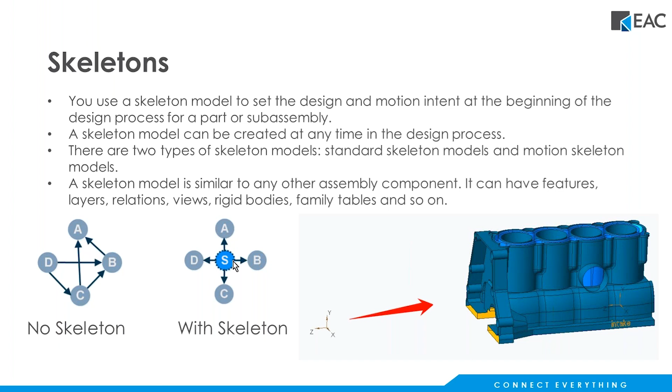So some important considerations to think about. First of all, you can only have one motion skeleton in an assembly, but you can have multiple standard skeletons in an assembly. There's a config option. By default, it's set to no, but if

you set multiple skeletons allowed, yes, you can have

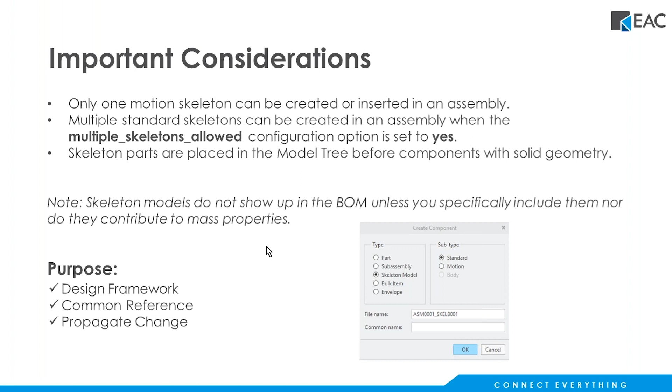Maybe another way of working with this is to put the skeleton at the top and have the subassemblies reference that skeleton, and then all the parts reference the skeleton assembled into those subassemblies. Again, all these skeletons are identical, so they do have or can have more information in them than what subassembly 2 needs, because it has information in there that 1 has.

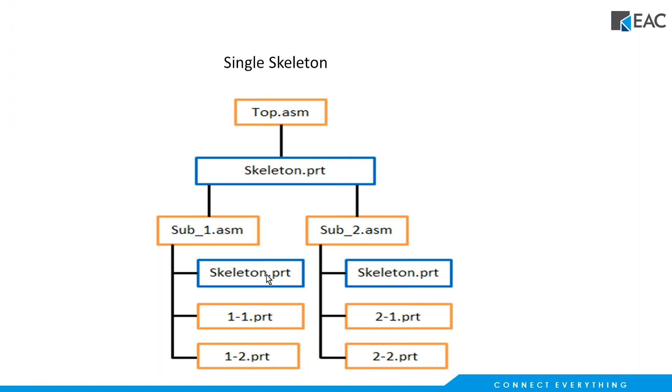But again, it's a real simple technique to use to kind of control the referencing of parts. Then we have multiple skeletons. So in that particular case, you have a unique skeleton for each subassembly. When we put in multiple skeletons that are all unique, we put one under each subassembly. And then that has the unique characteristics that only that particular subassembly would need.

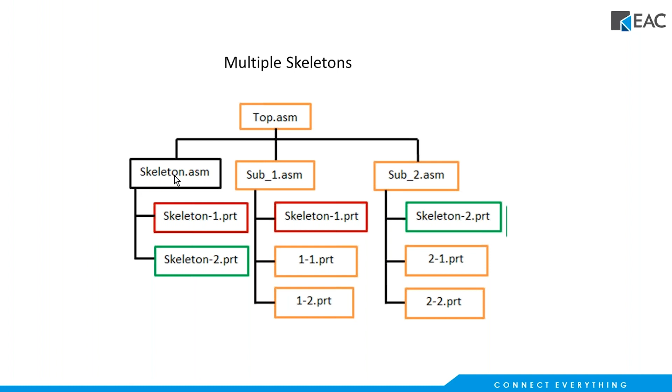Maybe another way of looking at this would be, I'm going to create a skeleton assembly. Now, there isn't really a model type or file type called skeleton assembly, but what you do is you just create an empty assembly, and then you put the skeleton parts in it. So in this particular example, this skeleton assembly, or basically it's just a regular assembly, it's just a holder. It's like a bucket holding various skeleton parts that I'm going to use in my top level assembly.

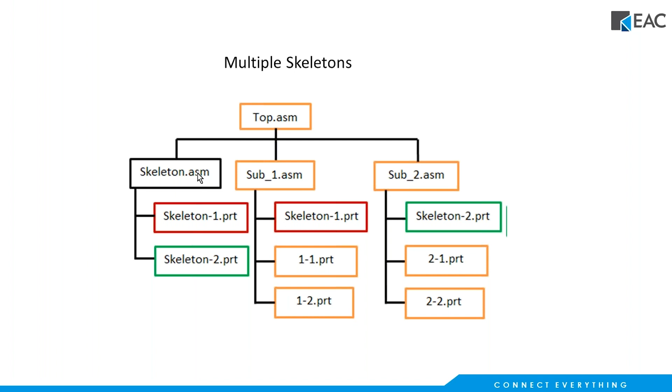And then those individual skeletons are then assembled into each individual subassembly. So just kind of a different way of organizing things. A little bit more elegant, maybe, doing it this way by placing them all under an assembly there, so we can have kind of one-stop shopping where we know to look for all the skeletons that we may need.

The next one, as you know, is hauntingly similar to what we just saw. It's called a skeleton assembly. It's the same approach where each subassembly gets unique skeletons for it, but it extends that multiple skeleton approach by, in this case, these unique skeletons are in a

skeleton assembly, but their locations and their orientations are important, right? So we're basically making an assembly of skeletons, and they're all assembled in the correct location and orientations that they would need to be in the assembly if they had parts in them. And then again, we just assemble each one of those skeletons into the individual subassemblies.

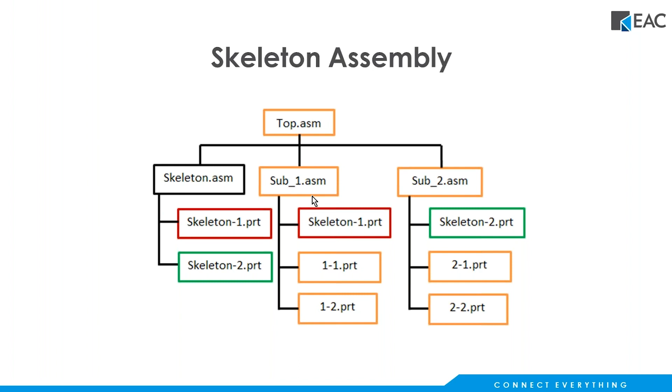The final technique is called the Hanger Map Method. And this is kind of the old school way, right? And even some of the NX guys still work like this, where in this case, we might have a series of coordinate systems. Here I have a skeleton with coordinate systems on it. But then what we do is when we assemble our parts is we just say, I want the part coordinate system to align with the skeleton coordinate location.

And we're just basically hanging the parts on these coordinate systems. You don't have to use coordinate systems. You could use datum planes and things like that. But to keep it simple, if you use coordinate systems, that's probably its biggest advantage, is that it's simplistic.

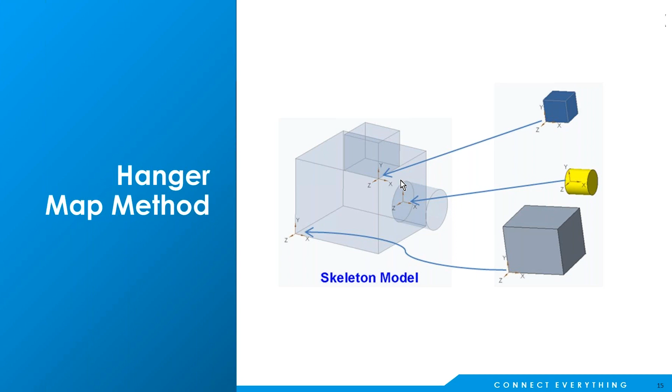So now that we've talked about these 4 different techniques, you want to start to think about really what do you want to accomplish with your skeletons? Which one of these techniques do I use? What are the objectives of my particular assembly or product that I'm working with? So there's a couple things that we want to look at.

First of all, we want to look at reducing complexity. And that just means that we want to minimize component interfaces to the top assembly, right? So we want to kind of shield those components from the top assembly using the skeleton as an insulator. Second, we want to simplify the modeling effort. So again, we want to reduce external references, not only between components, but also to the assembly itself.

We also want to increase design flexibility. Does it support changes to the interfaces of those subassemblies, or can we easily change those? And can we easily change maybe space claims for those subassemblies? And then we also want to think about large assembly management, right? So does it allow for modularization of the top level assembly? Can you break down the top level assembly into various components?

And then does this particular approach allow for the control and sharing of common information? So even though we might have different skeletons, we might want to pass information between them. It could be parameter information, it could be relations, things like that. So we still can pass things between skeletons. Does this approach that we're going to use allow for that type of passing of information inter-skeleton, if you will?

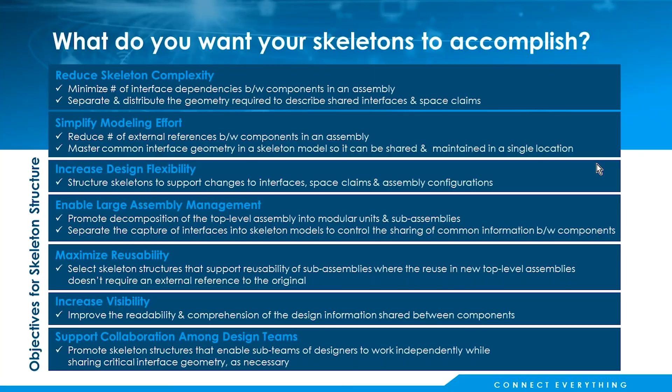The next thing we'll talk about is multiple skeletons. Well, let's take a look at a single example of a single skeleton first. So I have Creo up, and here's an assembly. This is an old Creo assembly from the old days, but what we have here is I've taken the motor, the block of the motor, and that's really the skeleton. So here's my skeleton. What I've done is I basically used the old master model technique.

What I did is I created a skeleton, and then I said merge in the motor block. And when it brings it in, it doesn't bring it in as a solid, but it brings it in as a quilt. And when we talk about skeletons, I kind of look at them from the standpoint of they do one of 2 things usually. They provide locations where things should be mounted, and it also can provide an envelope on where things should fit inside or fit outside of.

In this particular example, the reason I used it as a skeleton is because it has both. So I could have easily made this skeleton with a couple of axes here where the mounting hardware would be, and a couple more down here, maybe a cylinder to represent where the sleeve would be for the piston, and then maybe some internal surfaces for where the crank needs to go and an axis down the middle and things like that. And that would be a pretty simple skeleton.

In this particular case, though, the skeleton not only has all the locations of where I should mount things, but it's also being used as an envelope for all the internals of this. So now the piston knows where it should fit and how it should fit in this particular motor block. The same with the piston rod and the crank and things like that. So this particular skeleton is being used both as an envelope part and as a reference for mounting.

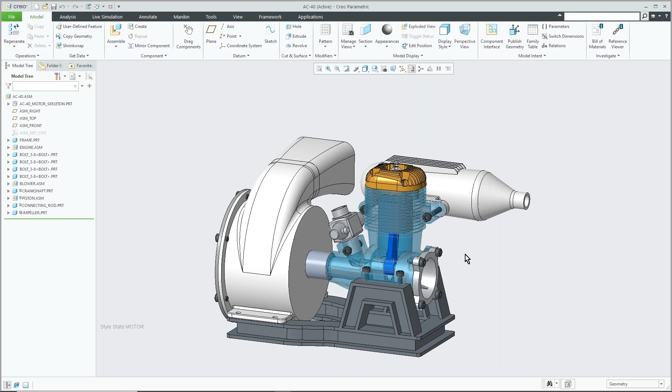As you can see, it can be pretty complex, right, compared to a couple of coordinate systems and some axes and planes and surfaces that I could have used. But again, this is actually a really good technique for something like this, where with this particular skeleton, I'm mounting everything to it. They all kind of use the same skeleton information. Every one of these assemblies uses this skeleton.

So let's go back and let's talk about multiple skeletons. So that's really where we have a unique skeleton in each subassembly. The design information of the entire product is split up, right, between the subassemblies. Skeletons can be referenced across a wide range of subassemblies.

So we can break the information up into a variety of different subassemblies, and then if we have a larger company, we can part out those skeleton subassemblies to the other groups that would be designing this. So it's a really good technique for breaking down the information into unique packets and then distributing that to the different design groups that are there.

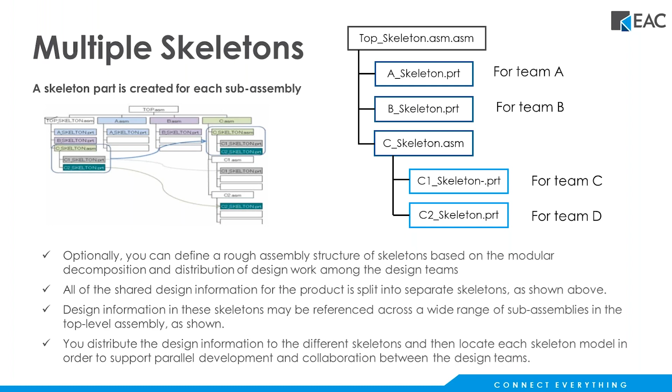So let's look at an example of this. So here's an example of multiple skeletons. Here I have a framework, and I have 3 cabinets that this framework supports. Each cabinet is totally unique. It doesn't interface with the other cabinet, other than the fact that it might be next to it. But all the components that go in it, these are space claims that I'm using these skeletons as.

But each subassembly or cabinet in this case is unique. So the components that go in it are unique. Its function is unique. So it's a really good reason to use multiple skeletons. So here I have just 3 skeletons out here in our tree sitting at the top. Whenever you create a skeleton, first of all, in an assembly, it automatically moves it to the top. You can create it whenever you want, but it will always move it to the top.

If you assemble a skeleton into an assembly that doesn't have a skeleton, it automatically assembles it at the top at 0, 0. Any skeleton after that, you can assemble like any other skeleton or any other part with mates and aligns and offsets and things like that. But here I have those 3 unique cabinets, right? The left cabinet, the middle cabinet, and the right cabinet.

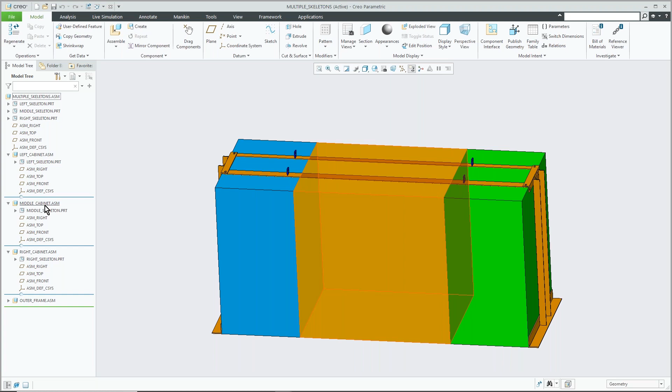And I've taken those skeletons and I've assembled them into each subassembly. So here's the subassembly for the cabinet, which has the left cabinet space claim for the left cabinet skeleton. And then here we have one for the middle, and then also one for the right. So all I'm doing is just taking these skeletons and assembling them into the subassembly, and then I can part out those subassemblies to various groups, and they can start to design, in this case, within the bounds of the envelope parts that I've created here as skeletons.

Let's take a look at the next one, the skeleton assembly. This is real similar to what we saw here, but it's a little bit different. I'm going to go through this one a little bit more in depth because there's a little bit more to it. But a skeleton assembly actually extends the multiple skeleton approach by adding the skeleton organization in terms of an assembly, and those individual skeletons are assembled in orientations and locations that the actual subassemblies would be in. So this is really useful for large assemblies with many unique components developed by multiple teams.

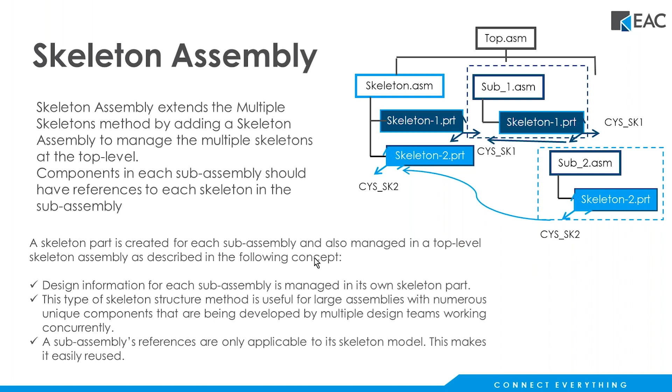Subassembly references are only applicable to the skeleton that is in that subassembly, which makes it very easy to reuse those subassemblies and those parts that reference those. Because they're only referencing skeletons, it's easy to pull them out and use them elsewhere. So let's look at an example of this. So in this particular example, this is a computer. And what I'm looking at here is the top level skeleton assembly. So what I did is I just created an assembly, and then I started assembling skeleton parts into it.

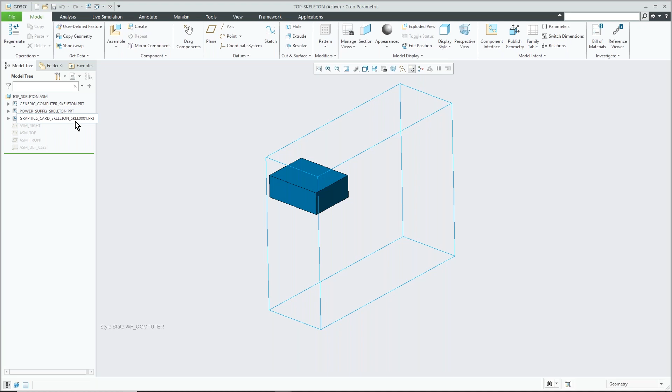So the main skeleton portion is really the outer box of this desktop computer. The next assembly that I assembled in is right here. This is the power supply. So the power supply just has space claim in it, right? So anything I create for the power supply goes inside of that volume. And then finally, I created something for the graphics card. And basically, this is a simple subassembly that has a coordinate system where the graphics card is.

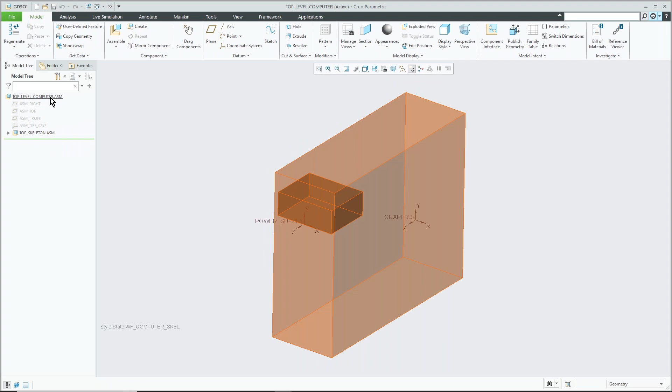Right? So you notice that these skeletons are located in the main skeleton in their actual positions. And this is going to become important in a second here. So I'm going to close out this skeleton assembly, and we're going to look at the top level computer assembly with the skeleton assembly assembled in it, right? So here's the top level computer assembly with our skeleton assemblies right here assembled in that we saw before. So now I can start to add and actually kind of part out these things.

So the first thing that I would do, I'm going to open up, let's say for the power supply, that subassembly. So I can copy this power supply into, create a subassembly for the power supply, put the skeleton part in it, and give it to the power supply guys to develop that.

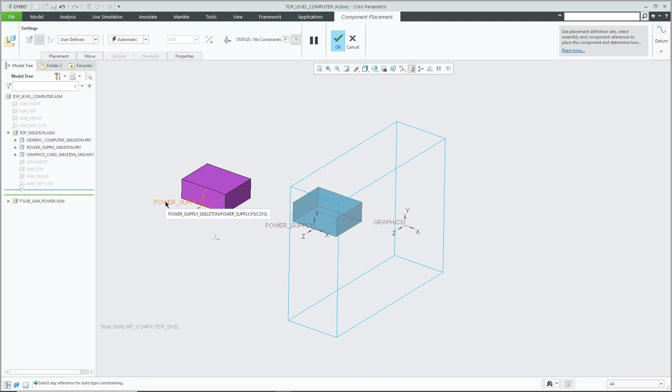So when they do that, I'm going to go over here and say, let's get the power supply assembly. Let's open that up. So here it is. Here's that skeleton. And what I'm going to do, so this is what's different about this, is I'm going to now assemble this. I'm using the skeleton in the subassembly and assembling it to the skeleton in the top level assembly. So I'm actually kind of assembling the skeleton to itself. So I'm going to say take this coordinate system and align it with this one.

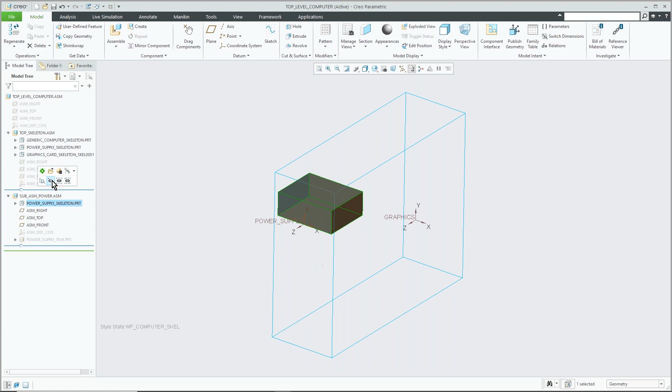So now in this particular example, when I added this subassembly in here for our part, I'm going to say let's hide our skeleton here and let's turn on the part that we have for that. So here's the part. It sits inside that skeleton. Because the part fit inside the volume and was correctly assembled into the top level assembly, everything works out good.

Same thing with the graphics card. So in this case, I'm going to say, let's take the subassembly for the graphics card. Whoop, not this guy, we got to cancel this. Let's go in and assemble in the graphics card. So here's the graphics card. And again, I'm going to use that coordinate system. So I could come over here and say, let's take this graphics coordinate system here and assemble it to this one.

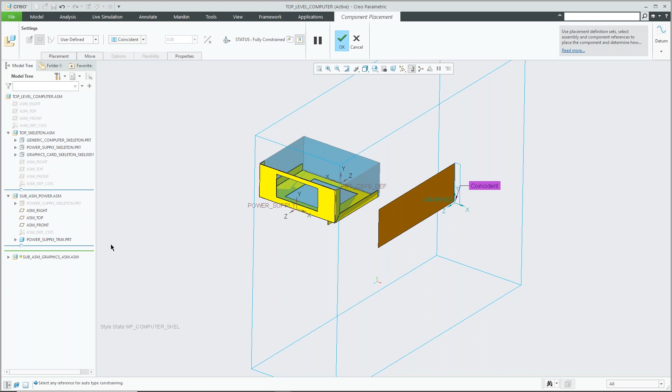In this particular case, what I did for a little subskeleton in here is I just put a plane in here. And this represents the board itself, the size of the board and the location of the board. But now I can start assembling the real geometry onto that. And so if I go in and turn on the components once they have been created, let's turn this guy on. We can see that we now have the graphics card assembled in the correct location. And with these reference skeletons, it's very easy for me to pull this graphics card out with its skeleton and assemble it somewhere else.

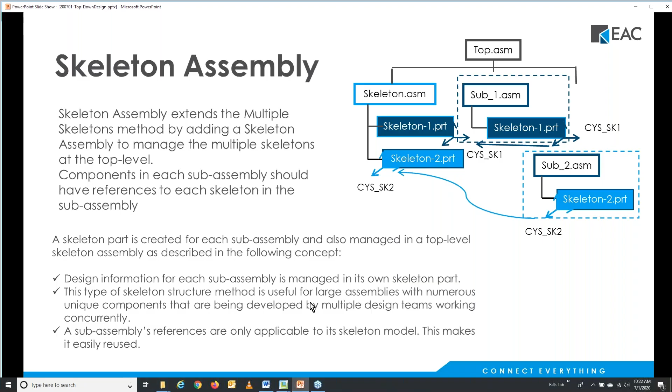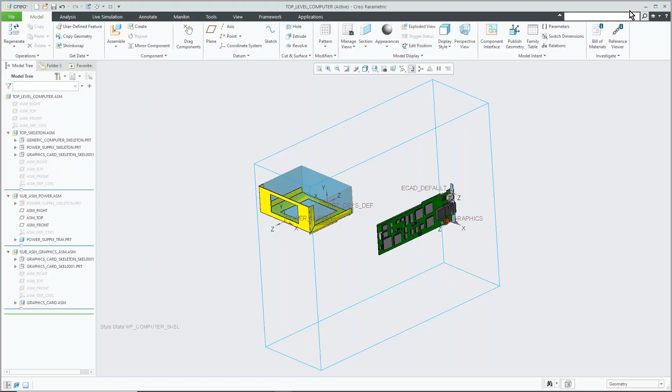In this particular example I'm using a coordinate system, and technically that's usually what people think of when they're talking about the Hanger Map Method. I'm going to place a subassembly in, but I'm just going to place it using a coordinate system. Real simple. But you could use datum planes in your skeleton and assemble it that way, should you choose to do that. So let's take a look at working with that.

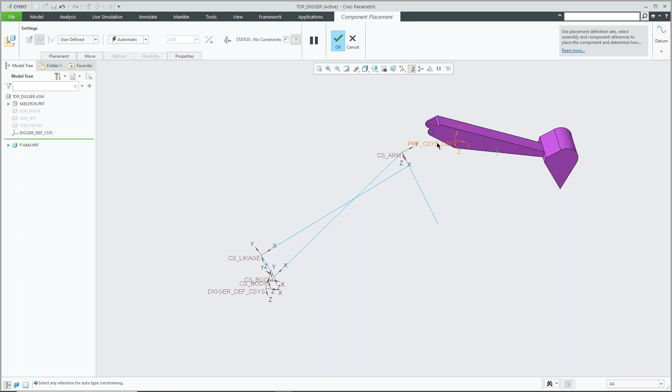Here I have a top-level assembly. I put a skeleton in there. The skeleton just has a couple of curves and then some coordinate systems for placing parts. So if I want to assemble my parts in here, I'll say, let's grab maybe the arm part. I can place that over here. Let's take this coordinate system and assemble it to the arm coordinate system. So first part's in.

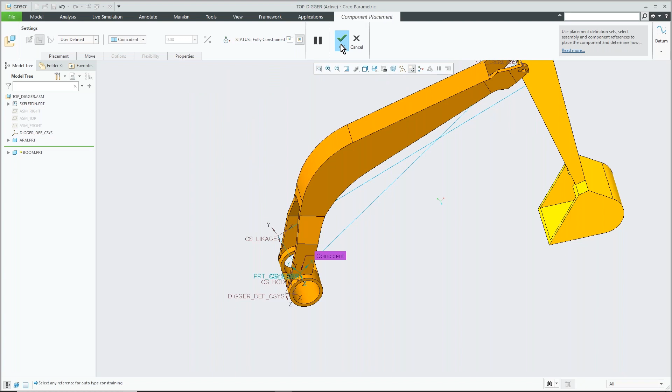Let's assemble in, let's say, the boom. So here's the boom. Let's take his coordinate system and assemble it to the coordinate system for the boom. And we notice that it's all oriented correctly, so things line up. And then finally, let's assemble in, I don't know, like the main body of this guy.

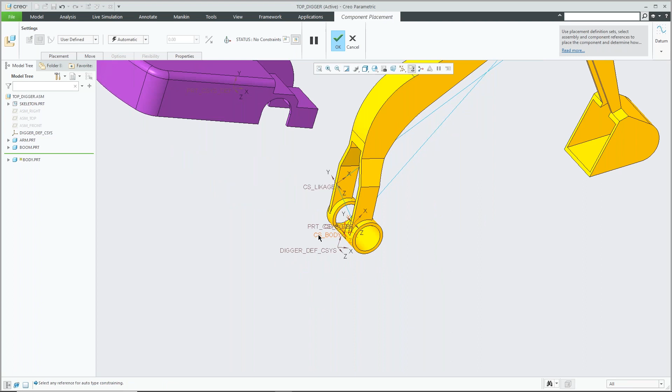Again, I can place him here. I could say, let's take body coordinate system here. And this guy has a coordinate system on him somewhere. There, he's automatically placed. And so this is kind of a kid's toy, but you can see basically an excavator. But it's really easy for me to put components in there, and they're totally independent of one another, right? They're only looking for their coordinate system, which happens to be on our skeleton here.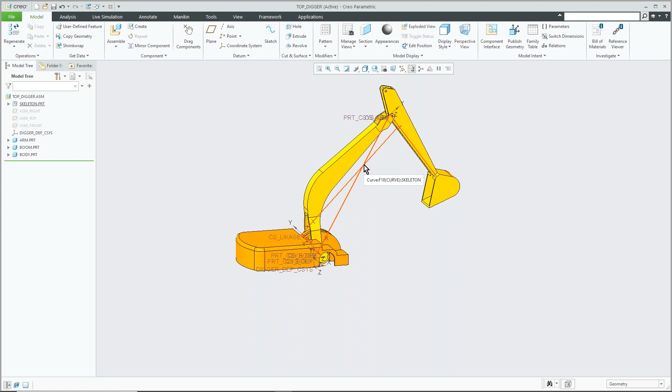So now that we've talked about the different methods, and there are different pros and cons to these methods, and you don't remember anything that I told you, but let's go in and kind of rate those, right? So now we're going to look at each of the 4 techniques I talked about and how they influence those objectives that we wanted. Is it easily visible? Is it good for large assembly management? Is it good for reducing skeleton complexity?

And so they have different ratings. 2 pluses means it's positive in a good fashion. 1 plus is pretty positive. 0 means has no influence, one or the other. Then a 1 minus sign is a negative influence, and then 2 minus signs, really negative.

So for the single skeleton, reducing complexity, not really, because everything has to be in that one skeleton, but for simplifying the modeling effort, it's easy because there's just one skeleton I got to worry about. But increasing flexibility, no, because everybody uses the same skeleton. It's hard to reuse them for the reasons I talked about. The visibility is pretty simple and straightforward. That's a positive because everything we need is in that skeleton. So if we look at that, we can kind of see what's going on.

So same with multiple skeletons. You can see that is a little bit positive or a little bit negative, depending on what you're looking for. The skeleton assembly, even though it's the hardest one to work with, because we're creating this assembly of skeletons and they're all located in the correct positions, has a lot of benefits through almost everything other than simplifying the modeling effort, because we had to make this skeleton assembly and make sure everything assembles correctly.

And then the hanger map is kind of very neutral, right? It's really good from the standpoint of reducing complexity because we're just assembling coordinate systems. Everything else, it doesn't really hurt or help too much. And it helps a little bit with increasing design flexibility, because we can move the coordinate systems around rather easily, and obviously that moves the components themselves. So these are the ratings that we put for these different techniques.